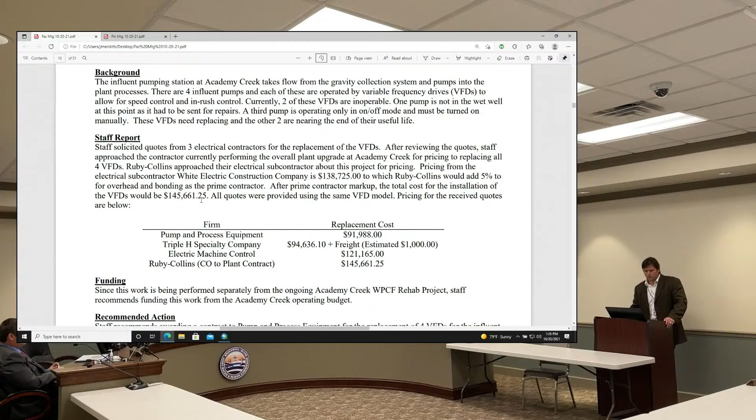$214,000 for 5,000 feet of water line replacement. But I guess it's a lot. There's a lot of permitting that's going to be involved with this one. A lot of permitting, yeah, you said that's right—railroad tracks. That's why I'd like to see where it is.

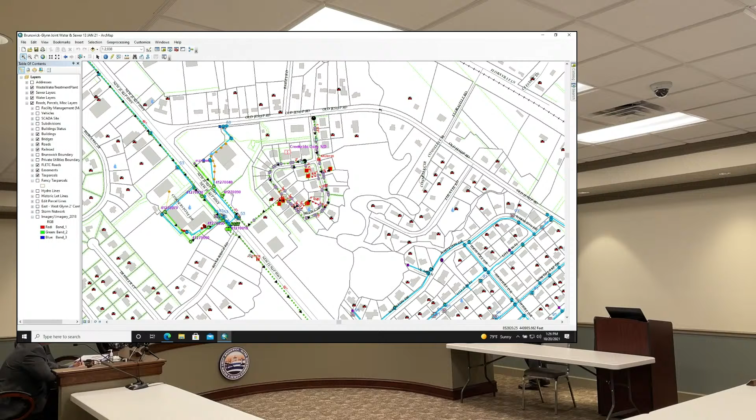Got it, so let's take a look right here. Okay, Tractor Supply, who's familiar with where that is? 341, yep, okay, Tractor Supply's right here. Creekside Oaks is a private water system, or they're on their own water right now, actually. So there's a step out. Yeah, right.

Old Jesup Road comes here, curves around and joins New Jesup Road, T-bones into it. Our water line stops right here. So this is one of the loops that we would connect.

All the way to 341? It would go all the way to New Jessup. Let me pan down just a tad. Not too hard there, is it?

There are some wetland areas in there. There's a creek right there. That's just straightforward though, isn't it? Right, most other than that it could be open cut.

The creek crossing would have to be replaced, open cut. Other than the creek crossing, you've got open cut, and it will require a DOT permit to come underneath New Jesup.

Yeah, okay, turn the ortho on so we can see. Correct, there's Tyler Creek right here, so that's a little tricky spot. Also Bailey Road.

We would also be dropping a T up to Bailey to Perry Lane as well. Now, when they tie in over at 341 and back at the other place, we're not gonna just let them use a tap and sleeve valve, are we?

Are we gonna require them to put in cutoff valves on the main line too? Because it's real easy for them to just say a tap and sleeve valve, but we sometimes need valves on that existing line also.

We've got a hand line out here that they would just tie into. Sometimes if it's hot and they can't isolate it, they'll do a tap and saddle, but typically we try to cut in.

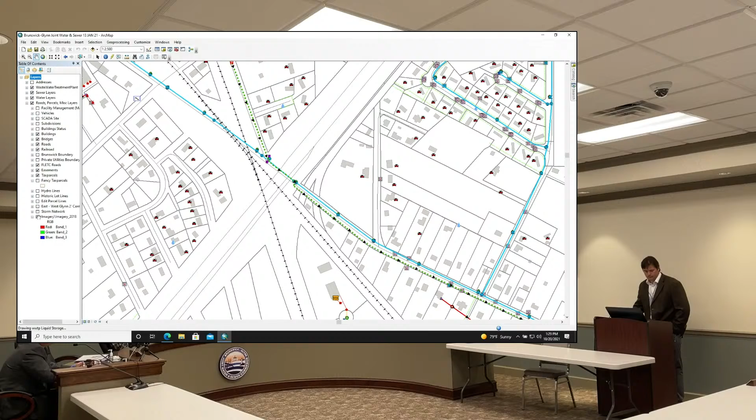Okay, coming to the intersection of Crispin and whatnot, this is the Hatala, the infamous Hatala. I'll turn this back on. That's underneath the interstate there, Old Jessup, come back just a little bit.

Is that where the pressure reducing valve is you wanted to put in, Andrew? Not right here, no sir. Cate Road comes down here, pump station 4105 is just a little ways up here, railroad tracks cross under here.

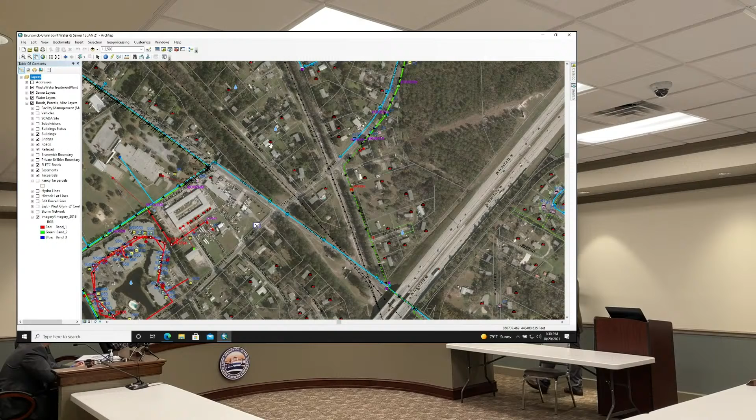And this would directly give redundancy back to exit 36, going to the north, feeds straight back down. Perry Lane, Crispin, whatever that is, right, the Kate Road right there.

Kate Road, you can see how far that is single fed, because that dead ends down there. There's only one line all the way down Kate Road right now. But this is just a straight line?

Did this line have any permitting? There'll be potential railroad permitting on this one. It parallels the railroad, so you may have to get into the railroad right of way to get that done.

I'm not real sure what I did here. They're not gonna let you put a parallel line in the right of way. We've got to figure all that out.

Well, it canceled it. Hit the restart at the bottom left, the circle, refresh. There you go, yeah, I was trying to not click too much. GIS gets mad when you click around. It does get angry, it gets angry.

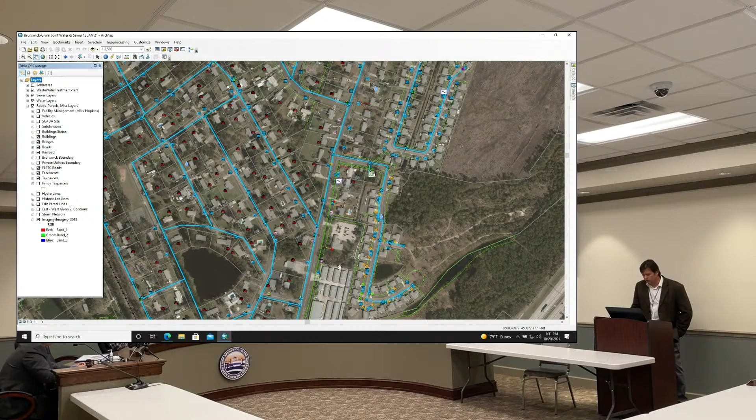So going back up, you'll see the school up here in a second. Back up Kate Road, so all those neighborhoods off of Kate Road are single fed right now off of Perry Lane Road.

So if any break happens down there, you have to shut off that entire main, and you're shutting off multiple neighborhoods. And then the last one you can see there would just be going under the spur.

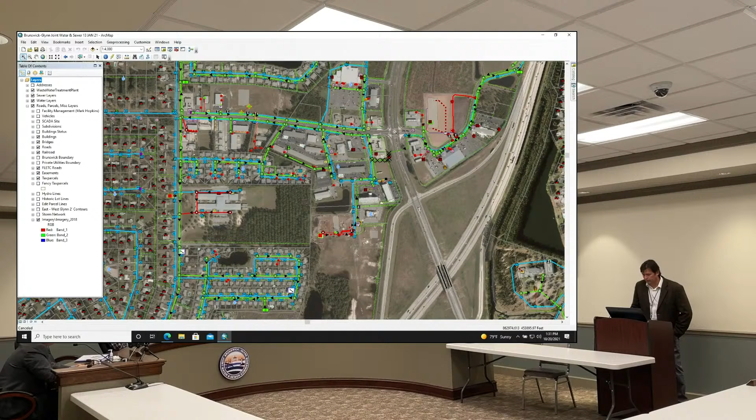Correct, right here in this vicinity, there's an intersection with a gap in the eastern system coming off of Harry Driggers, underneath I-95, and it stubs out here, dead ends. Then this all goes back, like Mr. Burrow was saying, towards Old Jessup Road. So we connect those two there.

Completing these 3 loops. When you're putting in water lines, how often do you have the ability to shut off the flow of water, a certain amount? Every 1,000 feet we try to put an inline valve, or at every intersection at least 2 valves, since there's a T feed in at least 2 directions, so you'd have multiple valves.

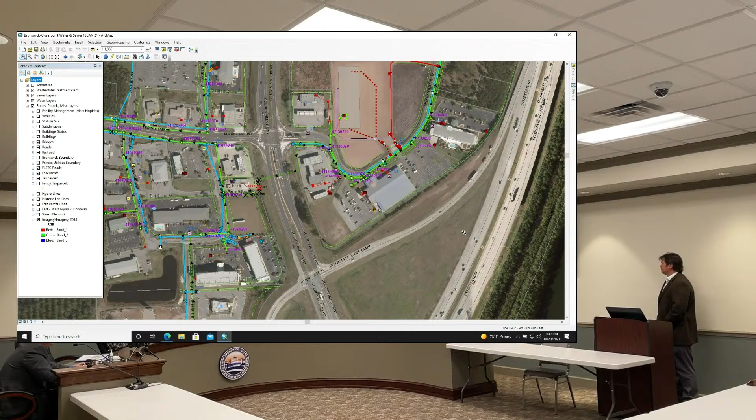Now, the water distribution guys want them about every 300 feet. They want 4 valves at every intersection. I can understand that. That's why when we tie in, the easiest thing is to put a tap and sleeve valve, but then you only get one valve at that intersection sometimes. Yeah, that makes sense.

Now, another question I have: is that all tied on those 3 lines? Yes, sir. Good. What's the scope of services that the engineer is providing for this? We don't understand what that is, it's not listed in here. So far as construction, inspection, design, that.

Permitting, bidding, construction management, reviewing pay requests, any change order requests, anything like that, plus 16 hours a week of construction inspection services. So they're basically our owner's engineer. Pretty much, yes sir. We will also have our inspectors out there periodically, but they will have their own inspector out there at least 16 hours a week.

This is the same firm doing the North Mainland, right? They were a subcontractor to the engineer on the North Mainland. But are they the ones providing the inspection on the North Mainland force main right now? Yes, sir. And is that 16 hours a week on that too, or what is it? 16 to 20 hours a week, yes sir.

So is it their inspector? Yes sir, Mr. Klink I think his name is, doing the inspection on that. And we're satisfied with that? Yes sir. That project took a while to get started, but I think when Mr. Klein goes through the project report, we've got good news to report on that progress thus far.

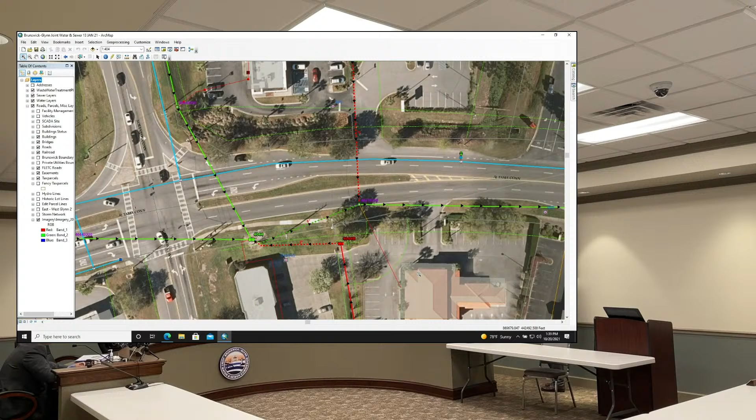And what's the reason for moving the whole thing over? The station here has a control panel and whatnot, so it's above ground and visible. The commercial entity here has requested numerous times, can we move it? It's difficult to move a pump station, but what this will become is the underground structure will stay there, and it'll essentially become a manhole, just a large manhole.

Okay, and then it'll be rerouted to a fenced in area. Correct me if I'm wrong, we don't actually own that parcel, we're there by easement, correct? It's actually an easement, correct. We have a dedicated water and sewer easement that this green line indicates right here.

It is an eyesore a bit, sitting there in the corner, it's noticeable is what it is. Similar to what you'd find in front of the Sonic, the station we just did in front of Sonic. Being in that easement, we're very restricted in how far we could expand the station and do any work at it. Certainly if we put a fence there, it would block their view, not good for a commercial entity there for sure.

So the new location's going to give us flexibility for the future also, if we need to expand it or increase its pumping capability. One thing to consider here on this pump station, everything from up by Home Depot goes across the spur and drains into the station. So this station doesn't look that impressive when you just drive by it, but a lot of water goes through this station.

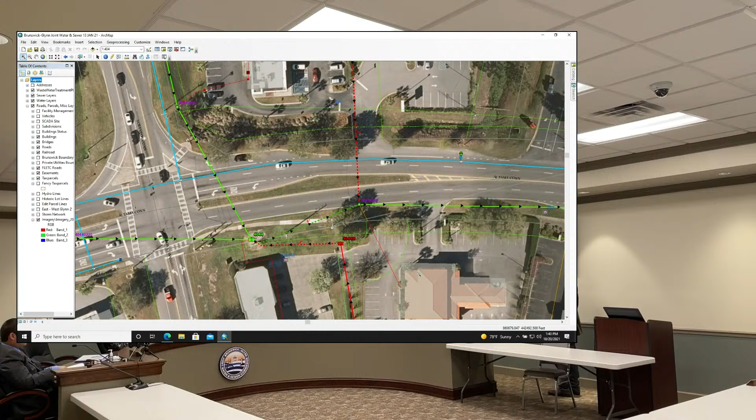What's going to be the capacity of this new station? This station, I want to say it's about 1,000 gallons a minute or so, because it's going right to essentially 4021, which is just downstream from here. Is 4021 the Sonic one? Yes, that's Sonic. I'll tell you something interesting to look at right here.

So here's the proposed site, here's the receiving manhole. It's just a very short distance of true lift pumping, a jumper station, so we get it to gravity right here. It's a shallow gravity manhole. Unfortunately, it's not deep enough to do away with the pump station. We sure would love to do that.

So it's just a jumper pump station? It is, that's all it is, a short little run, 50 feet or so. Could almost put a screw lift pump station in there for aesthetics. Screw lift pumps, okay. Old Archimedes. That would be the first one of those we had in the system.

I'd like to see that, that'd be pretty neat. And from an aesthetic point, is it going to look better than the one that's there now?

It'll be a little further off the road, and we will have a fence around it. For our fencing example, please drive by the K Street pump station we just finished, 4003. We started using this black coated vinyl fencing and it'll look a lot nicer out there. We have some pictures in the report we could show you. That may be our new standard for where we put fences, because that looks really nice out there.

So there's not a whole lot of inspection on this then? No, sir. No, sir.

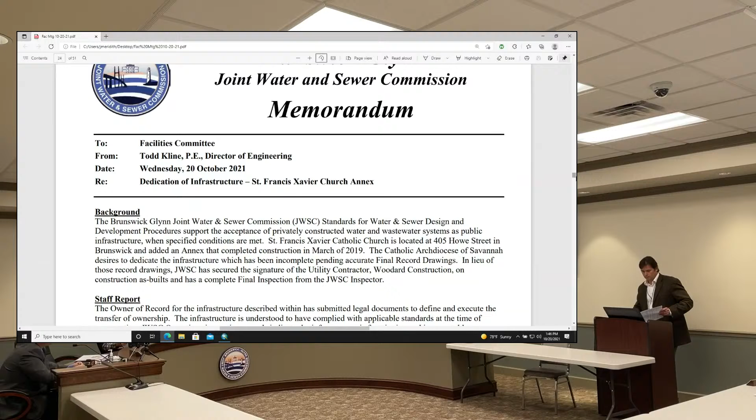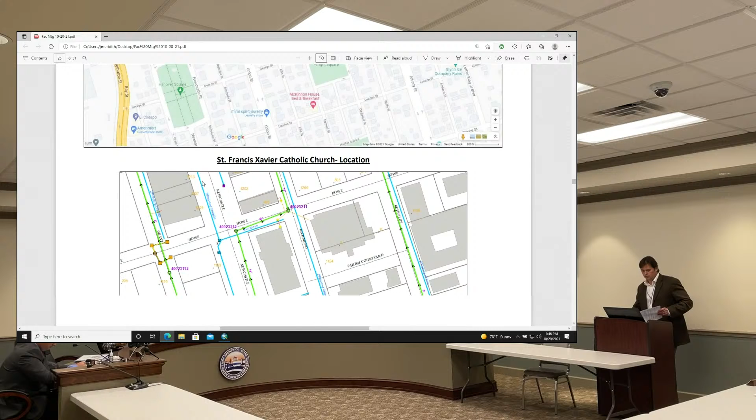I'm going to skip down through here so I can get to our... let's see. Okay, if everybody knows where St. Francis Xavier Catholic School and church is, it's right next to Hanover Square, just north of it. So what they did is they joined... and the GIS doesn't show how it formerly was. I can turn on the abandoned layer possibly.

They joined the two buildings here with another structure, and a water line was in between, and the sewer also went through here. So the structure couldn't be on top of these assets, so they chose to reroute the assets, and that's what they did. The sewer was rerouted, and the water was redone as well. GIS still needs a little updating once this gets worked through; it's been in a holding pattern. Part of our process is in dedications and new infrastructure, once it's dedicated and the board accepts it, then it moves forward with changing our mapping and all that.

So this one's been in a holding pattern, and it's kind of a good example to share. If you read the staff report, it talks about obtaining the record drawings. The end of every project is the closing documentation, which includes record drawings - that's the formal as-built, where everybody signs on it, contractor, surveyor, engineer, all that.

I think everybody here can understand the value of having record drawings of what's been put in the ground. It helps for future needs when somebody needs to tie into that or maintain it. Sometimes at the end of projects, the record drawings are looked at as a formality and sometimes brushed off, and we aren't quite able to close the documentation piece of it. That's why it's been in a holding pattern.

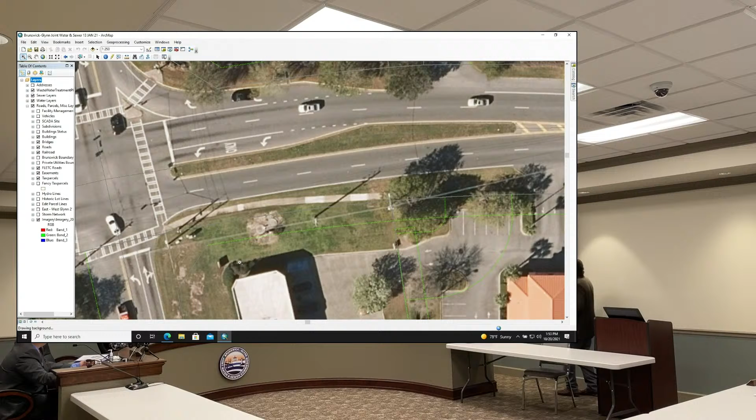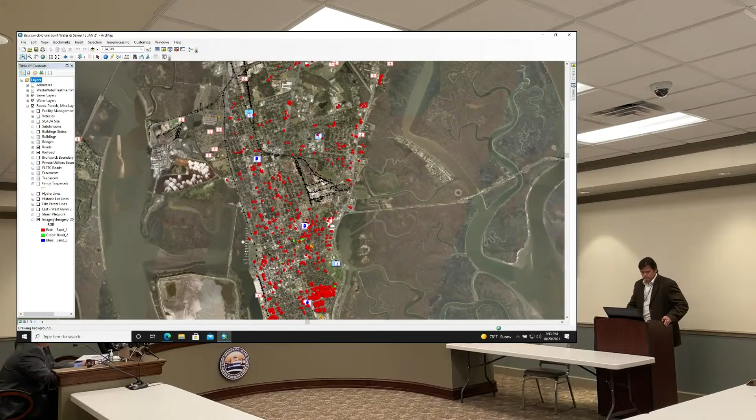Well, I can zoom in. Yeah, it's a good project. Very little benefit to having Richmond Street right there. Right, yeah, it's a good project overall. It helped the school grow and all that. I like that we did that, and I don't have a real issue with the variance.

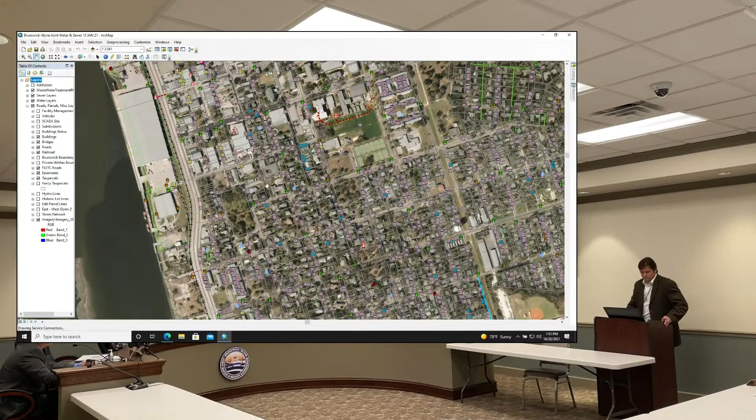It's just, I'd like not to pass the risk on to our customers. The most effective way to get record drawings is to make sure you have them before they occupy the premises.

Now, is the new line an 18-inch sewer line, right? That sounds plausible in that area, yes, sir, but let's double check it. Do we know what grade it's on? I would assume minimum. It is 18-inch, and amazingly, they were able to meet minimum grades. They actually were, I was really surprised. They lucked out in this case.

But 18-inch, new PVC, they didn't upsize it to meet them, did they? No, sir, they didn't do an upsize. They did a little cheap technique, no, sir. But they're not showing it here because the ortho is not updated, but they actually bridged right here with the building, from here to here. So this is all rooftop now.

So they closed that section of Richmond Street, yes. So there's a water line and a sewer line, is that right?

That's correct, that's correct. And we're going to clean our GIS maps up once that moves through the process. It'll go to GIS for closing, and they'll get the maps corrected and accurized.

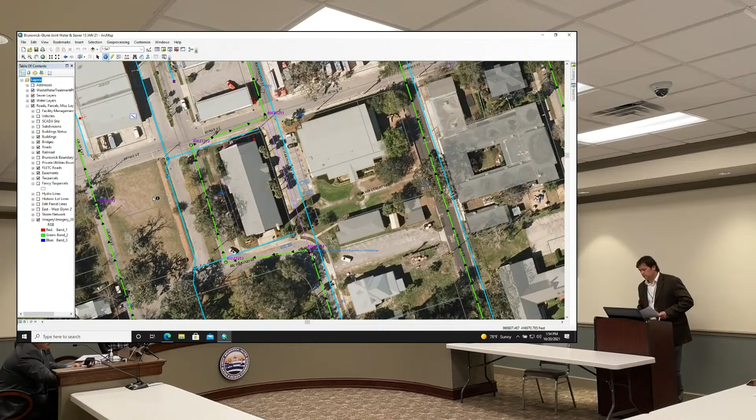Any other questions? All in favor? Motion carries 3-0.

Thank you, moving to the discussion section, Water Pollution Control Facility Plant Flows Report. Yes, sir. At Academy Creek, you'll notice the numbers from this month are remarkably similar to the numbers from last month, very consistent flow. We had similar type rain for the month, but at 7.8 million gallons a day, leaving the facility there about 58% capacity.

Everything in compliance on the way out of the facility there, with 96% removal on BOD, 96.5 on TSS. One thing I will note, at the end you'll see 113, 114 tons of sludge to the landfill.

Had a problem with the dryer where we were needing a thermal fluid pump that had a bit of a lag on it. That was installed end of last week, and those of you that don't know, we call the dryer Sarah. Sarah has been back up and running for a week, so we're back to drying sludge down there. How does the cost of that additional weight compare?

Well, $35 a ton is what we pay to dispose at the landfill, and we go from about 15% solids to 98% solids, so there's an awful lot of water that comes out of that. So basically there's about 60 tons in there, too. Yes.

Yes, sir. So now we have 2 pumps, because we ordered 2 to make sure that didn't happen again—about $1,800 in additional sludge hauling cost. Should we start looking at a backup dryer too?

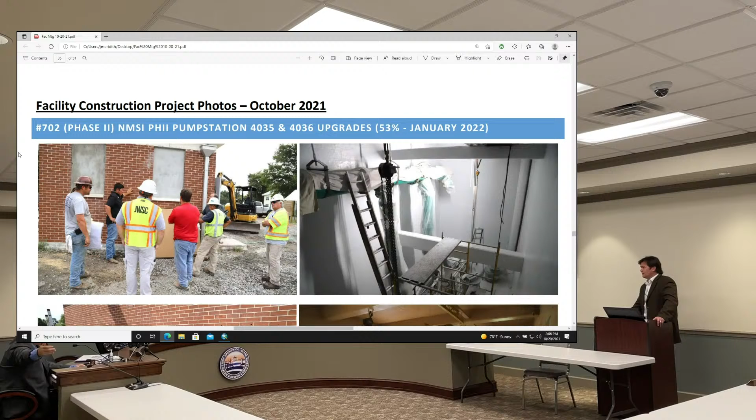This one's pretty visible, well, this side is. Yeah, heading down 341, right there in Arco. It's on the edge, and now we're going to have a black fence all the way around this one too. Fencing replacement's not included in this one, is it? That's a great question, I got to go back and check. We took it out when we economized it, and it came back higher than expected. We reduced the scope, I think we took fencing out of this contract. Yeah, because 36, I think it's the same way.

The fencing would block that. It's not from sticking up above the roadway, either fencing.

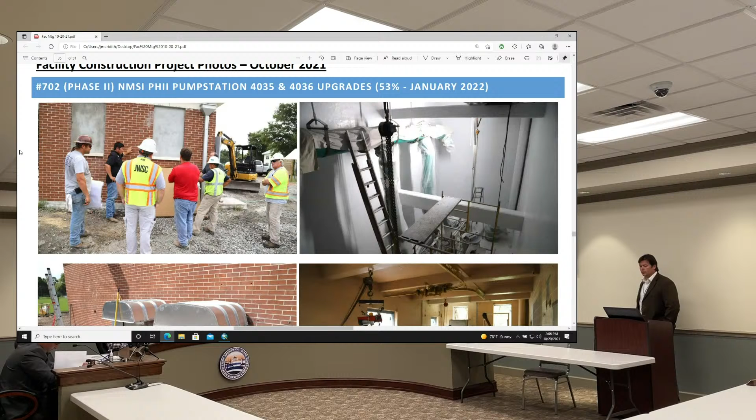Those are fairly decent looking pump stations, but if we got two big concrete blocks right in the center of it, I think that's not very pretty. They'll be painted to match the soffit and whatnot, but it'll look nicer than that. Certainly, if there's more desires, that's easy stuff to do there. But inside the stations, they're looking good, getting cleaned up, new ventilation on top of the wet well structure.

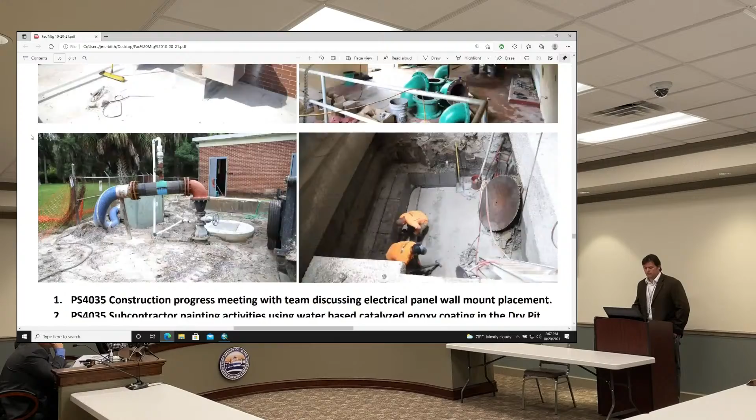Okay, and an associated project with this one is 702, force main reroute up off of Harry Driggers Boulevard. That's where all activities happen now. It's going very well. Pipe installation, all the 18-inch is essentially in the ground, open cut. And boring contractor should be here very soon. Water on canal will be moving forward as well.

According to the last message I got on an update Monday, they got to station 112 and they're testing up to station 112 now. Pump station 112? No, survey station.

Where's that? Beyond Southern Landing, back to the south where it curves around through there. There's still some stretches that need to go under some wetlands areas, so it's not all connected all the way down. We've got probably 9,000 feet of pipe in the ground, something like that.

And how much have they tested? Have they tested some of it? As they go along, they test, yes, sir. So, as Mr. Burris said, this last segment will be tested. He sent a message while we were in the meeting. They pigged it, they're fixing to go through, clean it and test it.

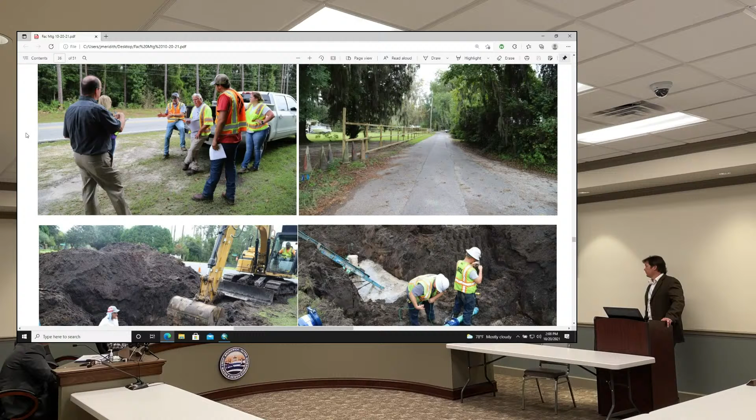How deep's that line? 4 feet, 5 feet. The open cut section, correct, yes, sir. You can see in this bottom picture, or the middle pictures, it gives you an idea. It's about shoulder height to these gentlemen here.

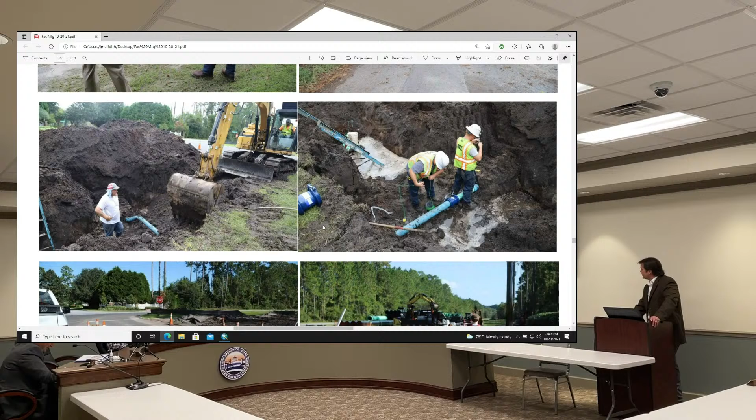See that down there too. That's where they got into an unmarked 4-inch water line. Who knows what that was, but it was in the ground and we didn't have any record of it. Maybe it was an illicit tap. Yeah, it could have been, or an old piece of PVC, who knows. But it wasn't sewer, thank goodness, because it's blue pipe.

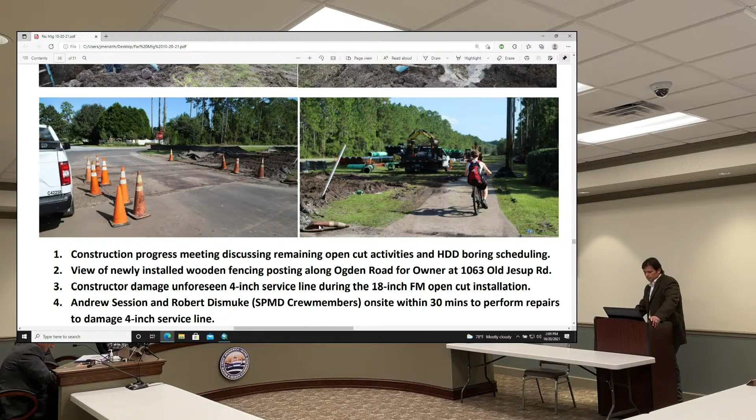I believe that is Southern Landing. I was thinking Southern Wind. Yeah, right there. It gives you an idea, they're keeping it groomed and in good shape, and our inspectors are on top of them. The contractor's doing a good job.

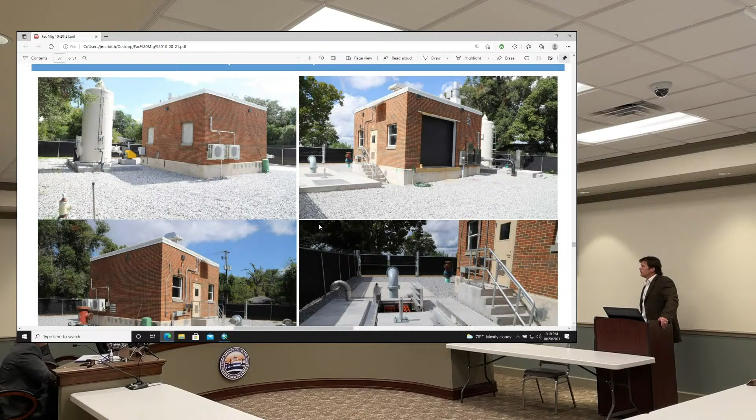Pump Station 4003, Project 703, is substantially complete. We're working through punch list items on this one, most notably some VFD issues. One of the VFDs is getting tweaked and adjusted. That's a good looking station. I really encourage you to drive by.

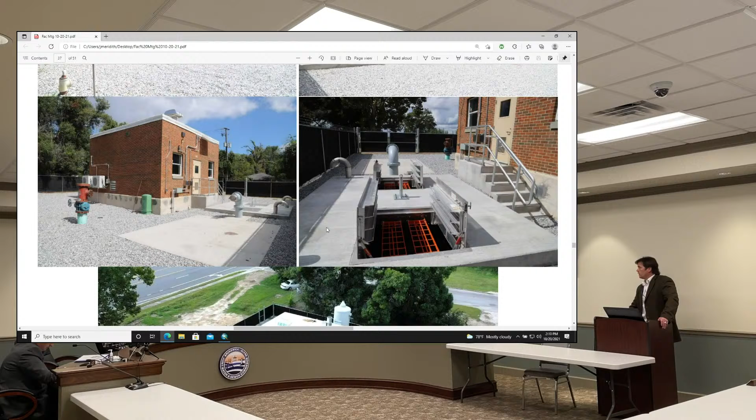The alleyway is reopened again, so the residents have access back through there. The fence is up, so we're not occupying any of the adjacent property anymore. We're all within our fenced-in parcel now. There's a pretty good overview shot of it from above. Looks really, really nice out there. Odor control tower to the north.

Two questions on this. Are they furnishing a bypass pump? No, sir, it's just a pad for our bypass pump. It's a pad for us to pull a bypass pump there. So we're going to put one there? Not permanently.

And all of this area around the site outside the fence, that's from their construction, correct? Yes, correct, they put seed down. This can be revegetated. Our site is the fenced-in area.

I think the city still owns it. They own all the way to the roadway. Are they down where your hand is now, back this way too? Well, this land here is owned by the tourist group. My understanding is they own this, and they actually allowed us to occupy it during construction. They gave us a construction easement. So now we've exited from that property, returning it back to them. So the city only owns out to the right of way. Correct, from our fence out this direction. And this is actually alleyway as well from here out this way. So this is back opened up again, so you can drive back and forth.

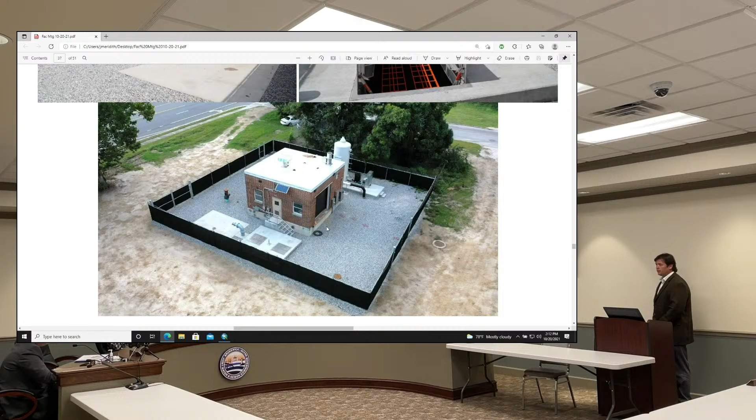So of course we had some challenges we talked about along the way, but I'll tell you what, the contractor really brought it to a good close here at the end. They've done quality work, and we hope to have these last couple items on the punch list addressed here in the next couple of weeks, and then the project closed out.

Okay, Canal Road to Glynco, project 704, this 12-inch water main has been on hold due to the wet conditions out there. That's an in-house project, and our pipe just arrived today for the directional pulls underneath the two FLETC entrances.

Well, that project actually has three parts. The open cut section we're gonna do along Glynco Parkway, we have a contractor come in and do the gates of FLETC, and then this project also is bringing a water line down Canal Road, down by Canal Crossing. Another one of those loops that will take it by the airport and everything and give it multi-directional feed.

Yes, tied in with this, this is going to give redundancy to the airport, industrial park, all that, because right now it's a single feed through FLETC's campus on Memorial Drive, a single 10-inch cast iron that feeds that whole area. So this is going to create redundancy here. It's been needed for a long, long time, and the Airport Authority is very excited about having this in.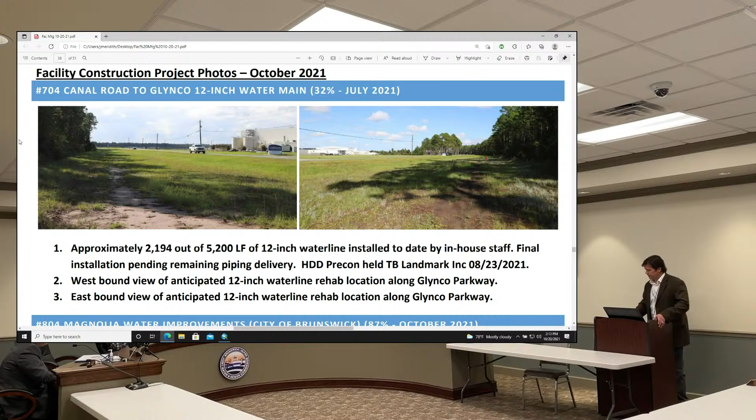Magnolia water improvements, all of our work, joint water and sewer work, is completed there. We are just awaiting eagerly record drawings and a final pay app from the city of Brunswick to close this one out.

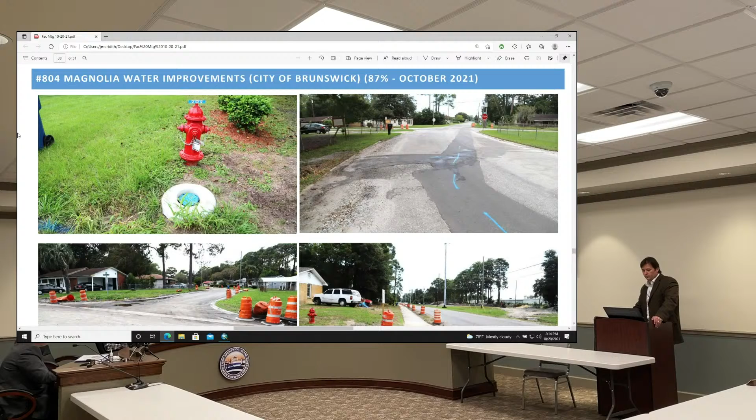So there will still be ongoing storm work and pavement work. There will, the city of Brunswick - our portion of the project is complete. City of Brunswick is continuing with their roadway and drainage improvements throughout Magnolia Park. And we're going to get them to straighten up this hydrant right here.

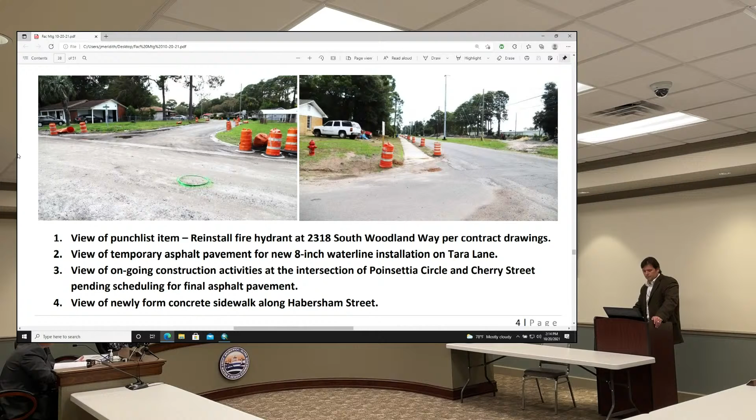Level tells the tale. What did we learn on this? Well, we learned that sometimes you can go on the shoulder of the road in established neighborhoods. It can be done. I was doubtful to begin with, but what we learned is Todd and I can be wrong, despite how much we don't want it.

Is this being recorded? Yes. Okay, I didn't want to bring that up, but...

What else did we learn, with the city and on projects like this? We probably learned something else too. Always something to learn. There's the combination of effort between us and the city - it's a good thing because you get in there and disturb the neighborhood one time to improve utilities and improve the roadways. That's a good thing.

Obviously there's the contractual side of things. We're working through the city's contract with the contractor, so we don't have contractual control over the contractor, so that's a little bit of a challenge sometimes. The city honors all of our, we have to review and approve everything, pay apps - we still control the money, but officially we don't have a contract with the people doing the work. That's one challenge that can come with cooperative projects like this.

But I think you get in there and get it done, you work together when you can. At least we're not, you know, streets being paved and then we're going in and tearing them up putting in water lines. It's painful for a bit and then it's done for the residents.

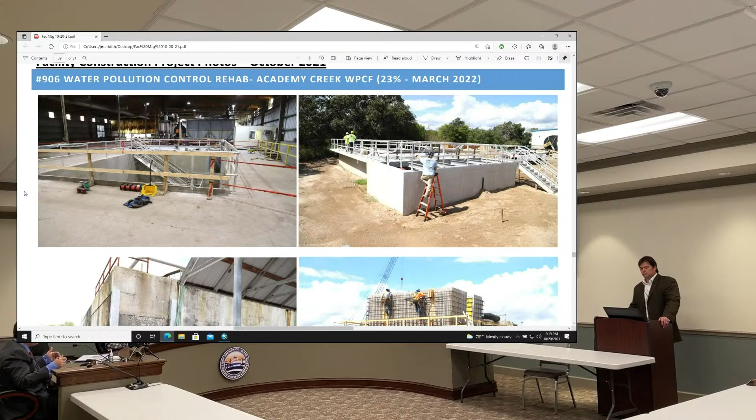That was in the contract? That was in the contract. I was up there the other day, I'm a bit of a belt press nerd, and it looked better coming off the belt press with the new polymer equipment than it had the whole time I've been here. So that's a win all day.

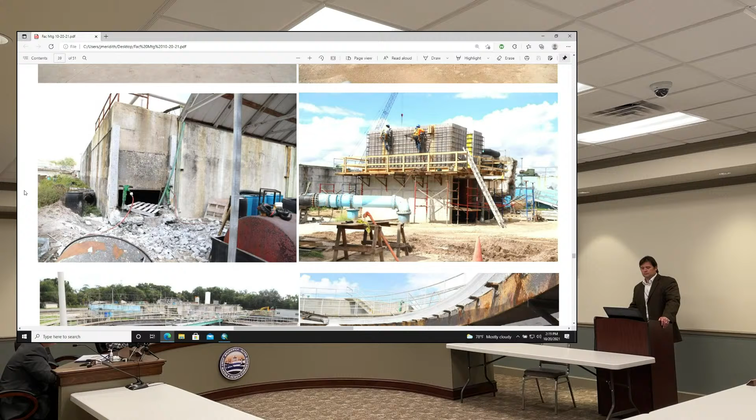Installation of handrails and grading is going on at the filter equipment. Go back up, on the right there. That picture shows the dryer at the very top. So you could explain to Commissioner Cook where the new dryer would go. It would go immediately to the left of that. What you're pointing at there is a boiler, so there'd be another boiler to the left.

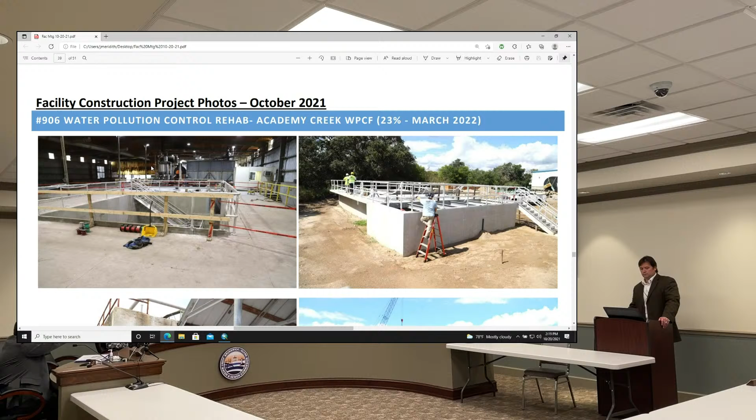And then the dryer, zoom in, let's see if we can do this. To the left of the pit in the foreground, the dryer is that round area. So it would be immediately to the left of that, the belt presses are to the right. So then that open area between the boiler and the dryer behind it, there would be a secondary boiler and dryer. Oh, okay, gotcha, okay, you can zoom back out.

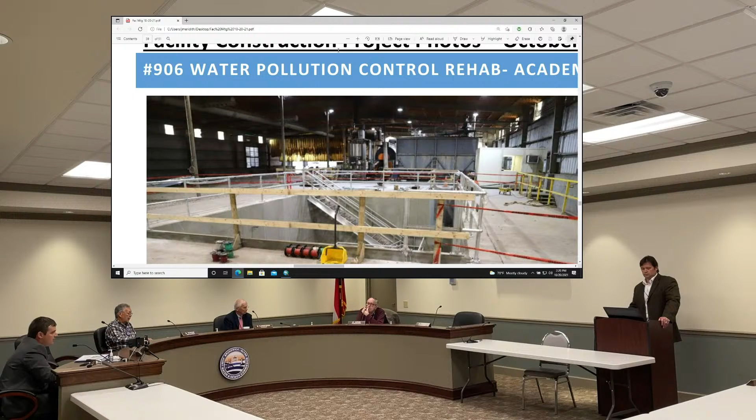So the filters are ongoing, they've got grading installed, and now they've got electrical panels installed up there. The wires aren't landed yet, but the panels are in place. And you now don't have to climb a ladder to get up there, they've got the stairwells in place, which is much easier for getting in and out.

Good. We go down, that is aeration basin number 1, that is where the RAS does not go in right there, but there'll be a new concrete structure adjacent to that that allows the RAS to go in. The existing one, when we got over there, we figured out there was about 6 inches of daylight between the bottom of the concrete structure and the ground. And we did not want to start dumping new amounts of flow into a structure that was floating. So we tore that out. Small change order on this, inside the allowable amount we had in the contract.

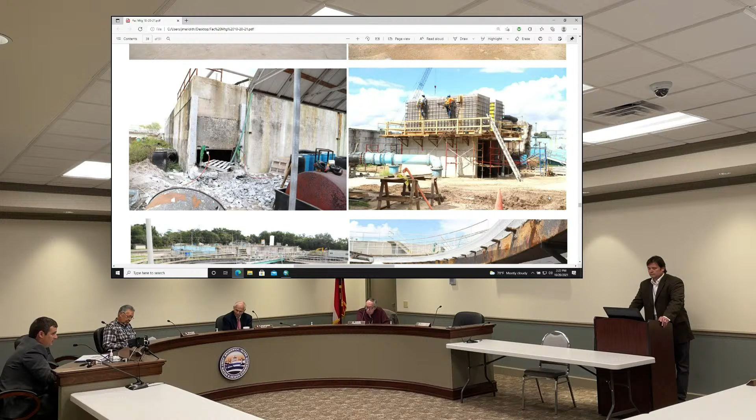And then we've been working on the clarifiers, shown in these bottom 2 pictures. The picture on the right kind of shows it more. You can kind of see those slanted fiberglass installations there. That is a density baffle that prevents sludge from short-circuiting and coming out. So as the velocities increase coming out of the basin, sometimes the sludge will go up the walls and go out. Those keep it from coming out. So that doesn't look like an awful lot of help, but that will actually prevent any sort of solids wash out in the event of high flows.

And we're doing some center feed well improvements. The flow comes up in the center of the clarifier and then disperses. The existing ones are circular, so technically a circle doesn't have a side, but there's 4 sides where it comes out. The new ones have 6 sides, so it helps disperse everything more evenly throughout the basin.

The weir troughs there, are we cleaning those up and repainting those? We're going to clean them up and get pricing on repainting. We got pricing on repainting all the weir troughs and the skimmer arms and everything, and that was a bit outside of what we were wanting to do there because we have 6 clarifiers, so it gets multiplied rapidly. But we're getting pricing on some touch-up areas.

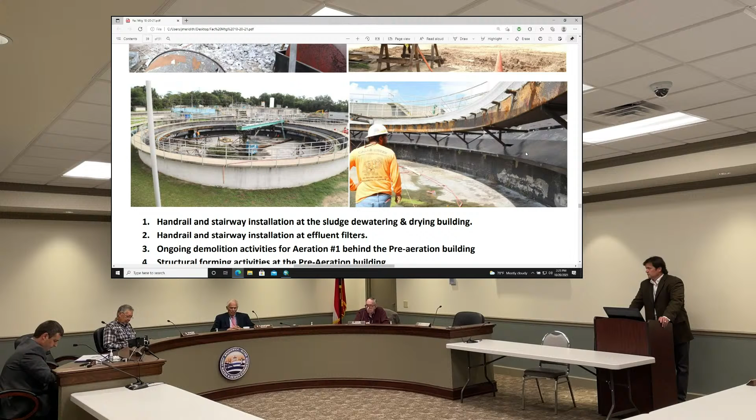And we've separated the sludge lines from clarifiers 1 and 2. I think that's all that we've got going on right now.

And when's the completion date supposed to be? First week of May is what is currently scheduled as their completion date. Contract date is March. But the bar screen has been delayed to the end of January.

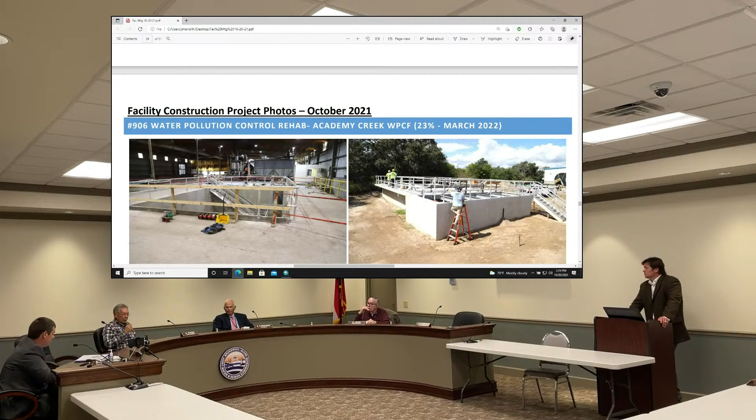Apparently there's a steel shortage, but the scrap prices haven't gone up yet, so that doesn't make any sense to me. Seems like if they needed steel, the scrap price would be increasing. It's all stuck offshore.

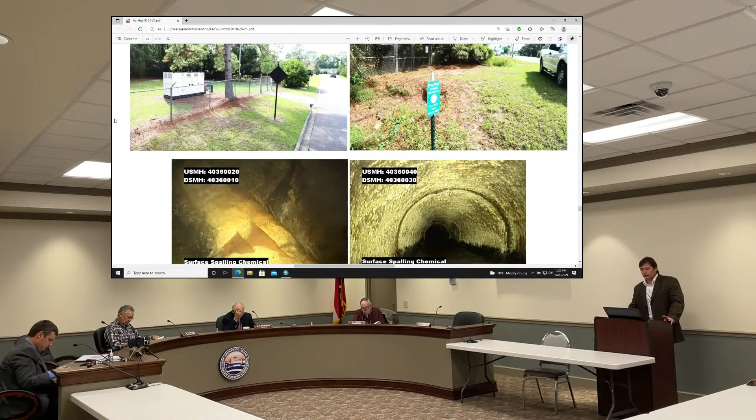All right, good deal. Moving along to basin 4105, 107, and 4036 CIPP rehab. So 105, 107, we're essentially 99% bid ready. We're going to make a determination on what we do for the upgrade of those two stations, and as part of that project is the 36 basin lining work. Just a couple good pictures of typical aged infrastructure, a couple defects and whatnot from some of the CCTV video.

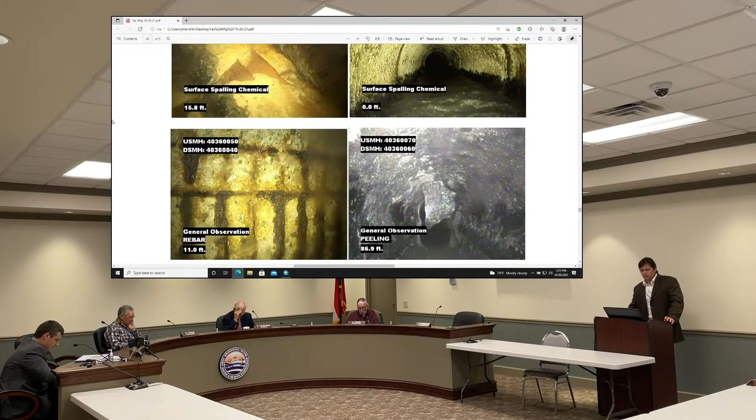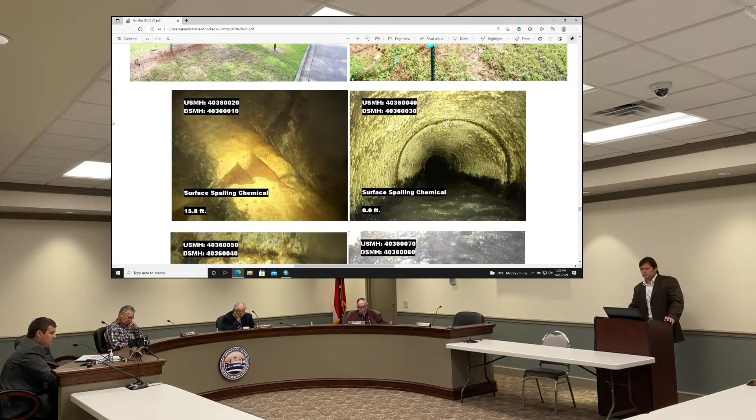That our contractor did. Where are these lines, Todd? A few of them are around exit 36. Okay, 36, that's the section from 36 directly upstream by the railroad tracks. Yeah, so that's behind Rich CPAC, off of Glendale. Is this a concrete pipe? Yes, sir, it's RCP.

Although there doesn't appear to be a great deal of reinforcement remaining. There's the whale bones, rib cage. Will we be able to slip line this, or will we have to replace it? They can line that. That looks very similar to what we just lined on Whitlock. It is, yeah. So this will be lined.

The company's back in town. They're looking at bypassing over the creek there behind 36 to do some of these pictures you see, that segment behind Rich CPAC running parallel to the railroad right now. So they're working with the county to trim a few shrubs around the historic Altamaha Canal and make that bypass across the creek. That contract's not for relining too, though, is it?

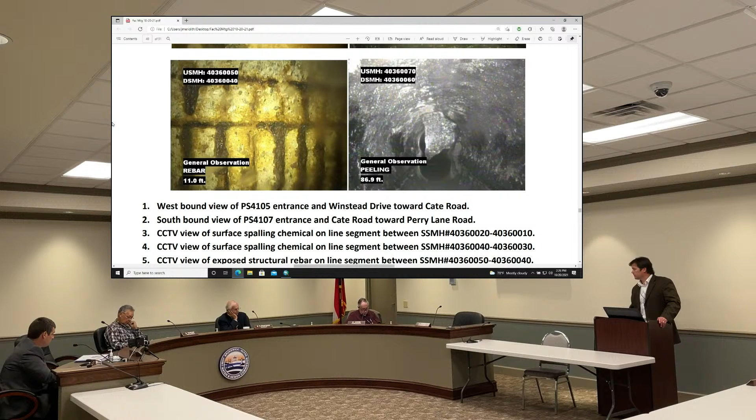Yes, sir. And this is all part of, it needs to be done anyway, but it's part of the reroute, the ultimate reroute whenever that happens. So this gravity line is in good shape to take that flow from 4105. Okay.

Okay, Bergen Woods, good news on Bergen Woods. So we expect by the end of next week to have all the pipe in the ground for the force main. That's the force main that serves the safety complex pump station 4116. We're really excited that the force main is in the ground. Looks like we're not excited that 4116 isn't done, but we're glad the force main looks like it's going to be done before the pump station.

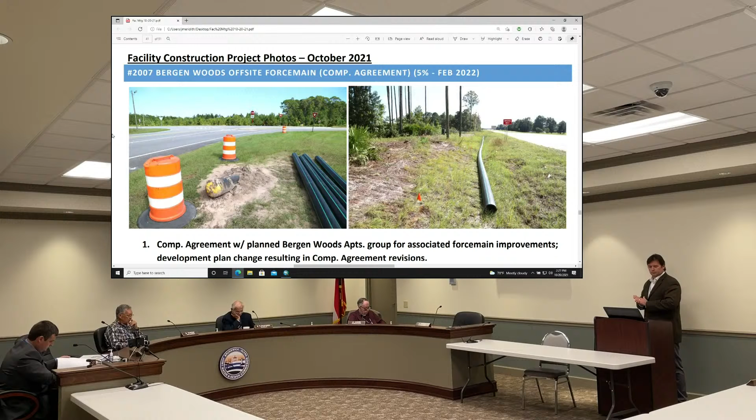Still waiting for a couple electrical items at the pump station to be installed. We'll be testing that. I think they're going to test it this week and make final connections and whatnot by the end of next week. So we're looking in good shape with that one. And this is a comprehensive project with Bergen Woods.

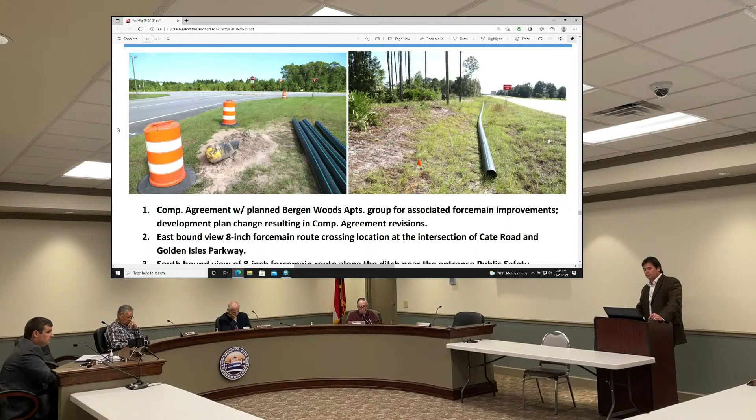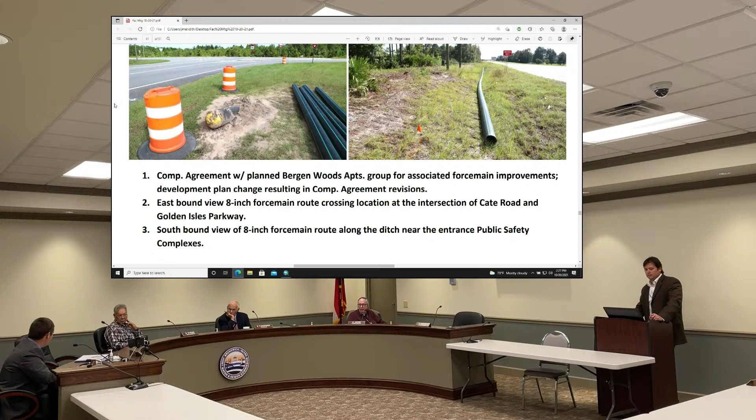An 8-inch force main, which opens up potential opportunities for extending further up the spur to neighborhoods. There's a couple neighborhoods up towards 99 that we've actually gotten some inquiries from. Additional capacity for a large tract of land right there in between. That's correct, 99 and the interstate and the spur. Right. So we'll see what the future holds with that one.

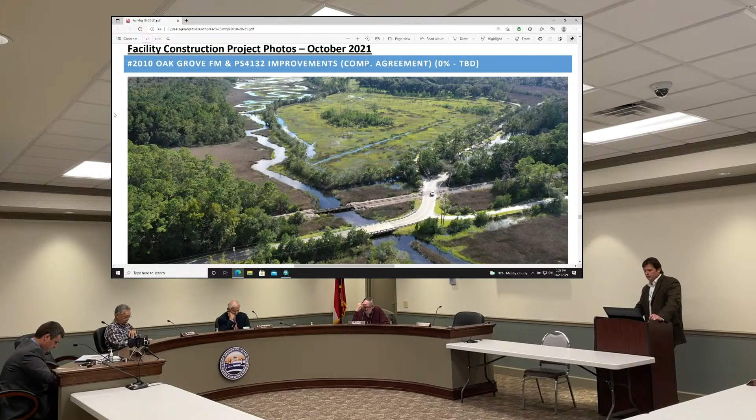Okay, Oak Grove Force Main and possibly alternate pump station 4132 improvements. Comprehensive agreement with a group that's doing a residential development on Oak Grove Island. That was bid out, bids are received, and they're under review by the applicant and the engineer of record to determine how they wish to move forward.

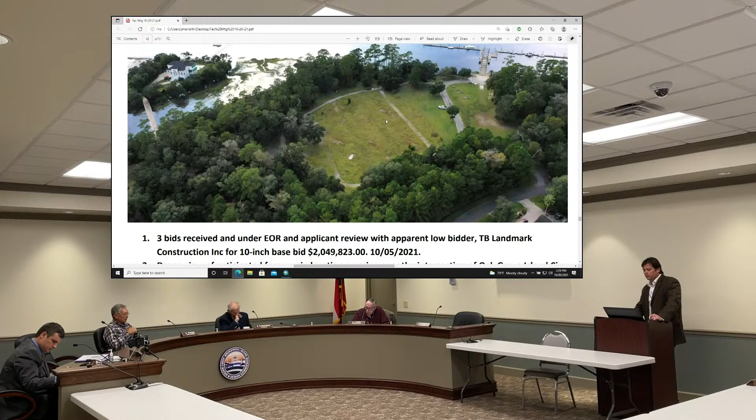That's the site of the residential area that's proposed on Oak Grove Island. These drone pictures are really good. They help give a good view, don't they? Yep, a lot of clarity too. Amazing, right.

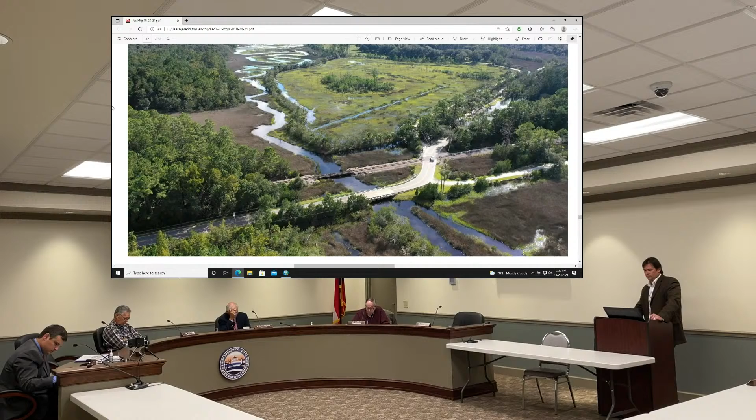Yeah, we have a good drone force of at least 2 or 3 certified drone pilots on staff. So, all right.

2002 force main replacement. Mr. Burrows, I'll let you take it. Yes, sir. This cover project is out for bid right now. We held a pre-bid, had 3 bidders attend the pre-bid. We are accepting bids November the 2nd for this.

We are buying material outside of the bid process. The bid process would be for the labor. We are getting quotes for materials so that we can get this work started and completed prior to spring break in March. Likely during this project, we're working with Glynn County.

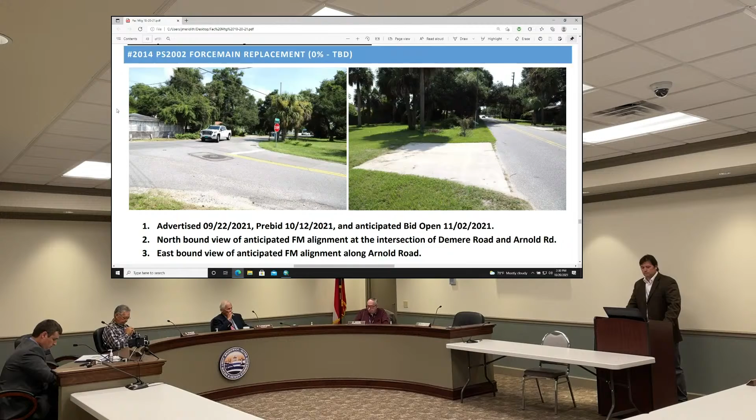We'll need to at least shut down one lane of Arnold Road during construction. It's only 1,300 feet of installation, which doesn't sound like a lot, but it is a crowded right-of-way right there. So it's going to be a slow dig along Arnold, and then we will be boring a section down Demere Road to tie into the existing PVC force main at Demere and Mallory. A lot of coordination - if you've been around very long, you've remembered multiple times we've had to shut down Arnold Road because the existing force main had failed. So this will be a new force main to get off that older cast iron force main.

Okay, Arco area water and sewer extensions. Pre-bid is 10/14 and bid opening is 10/28. Something for you to consider at the next meeting.

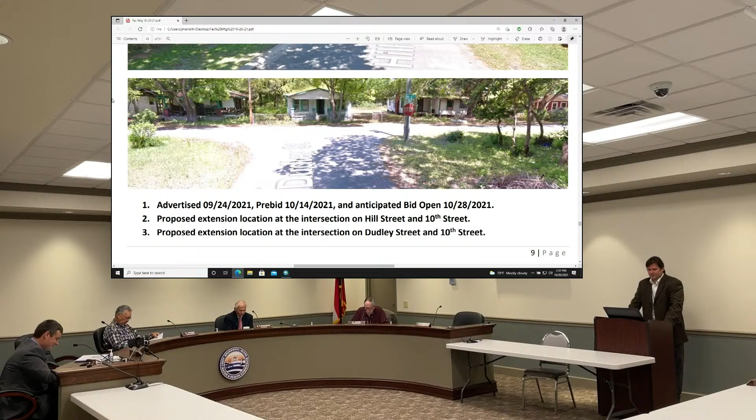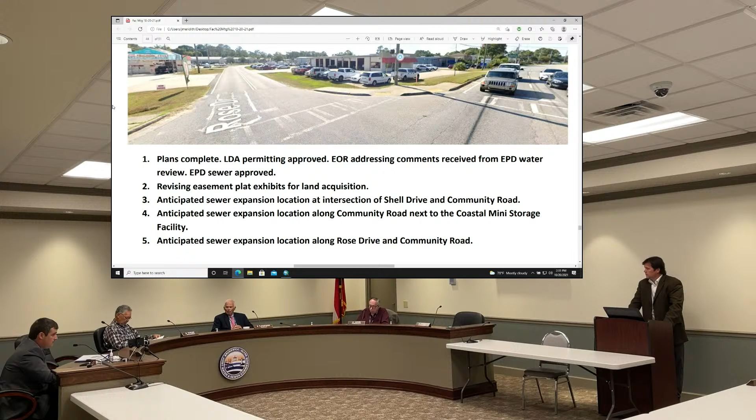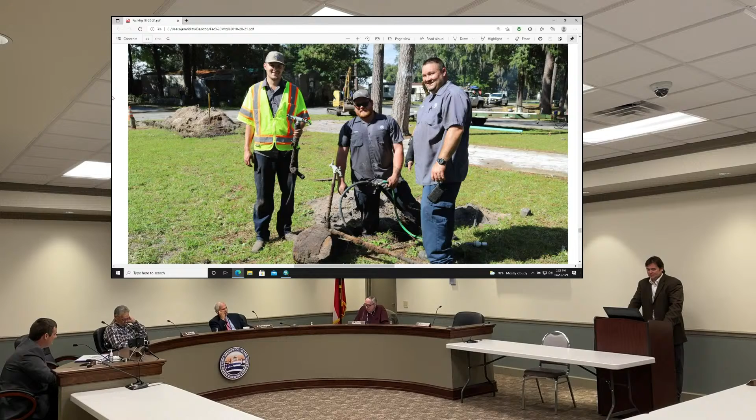Is that illegal connection on the existing galvanized service line that somebody tied into? Yes, sir. So it had been a long time ago - it's been there for a while. They hadn't paid a water bill in several years. Is that a service line we're replacing, or is this a galvanized water line? It's a 2-inch main. And they tied into it? Yes, sir, they tied into that.

It's going to reduce our unaccounted for water. Should it reduce the unaccounted for? Yes, sir. Right, so there's also some meters installed now.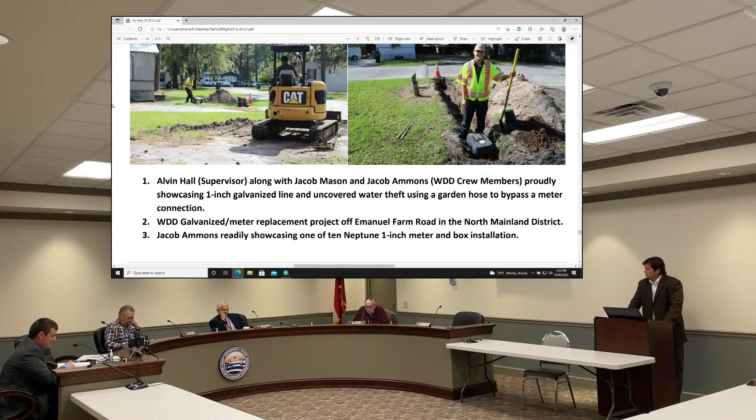I believe this is in - which mobile home park is this? I'm trying to remember, this is the one that's taken some of the trailers from New Hope. What is the name of the one over there? Emanuel Farm Church? Oh golly, I can't keep it - name's escaping me of the mobile home park, but anyway, they reached out to us for some assistance out there with some leaks that they had from the service lines, and the distribution team took the opportunity to install some new meters out there at the same time.

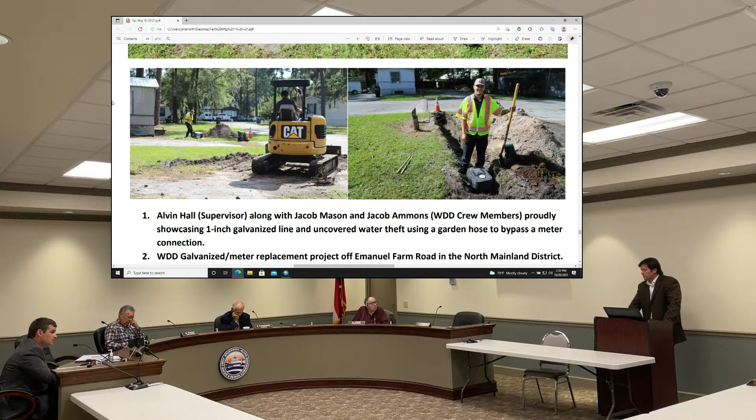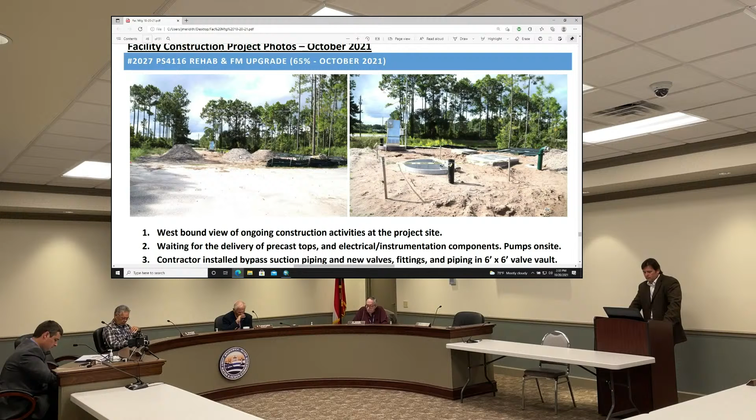All right, 4116 - mentioned this one briefly before. It actually looks a little bit better than this now. All the structures are essentially complete. There's a little bit of final site work, pushing the dirt around, getting this final site grade set, and electrical components were the last thing we're waiting on to get out there.

Got the pumps. Meter...

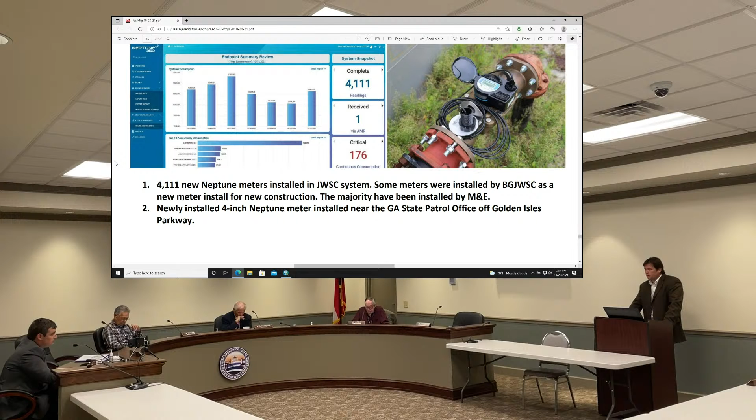Meter replacements, year 1 and 2. We've replaced, as part of the project, a little over 4,100 meters installed. Some of those are new installs, of course, as people get on the system. So we've replaced about 3,900 meters, I believe, so far with the project. Most of those have been 5/8 and 1-inch meters. We do have some of the larger meters replaced. They have been completing an audit of our existing system to determine the amount of new brass that is necessary as part of these installs. Fortunately, we received that audit result back this week to get a better understanding of what the overall cost of the project is as we go forward, because we have to get a second loan to cover the cost of the project. So we'll have the results of that for your consideration at a future meeting.

But they should be back on the heavy push for installs right after the first of the year, about to get kicked back off with all of that. So when they were installing before, they were doing between 60 and 80 meters a day. That gives you an idea - once they get back rolling, and now they know what to expect at every install, we'll be putting meters in the ground very quickly. We have been replacing some of the larger ones too, right? Some of the larger ones have been replaced.

Of course, with everything else right now, the materials, even for some of the larger meters, and the fittings and things, have been a little hard to source.

What's our interest rate on a GEFA loan today? Current GEFA loan is 0.07%. It's like free money. Is that for the whole meter replacement project? That's for $7.5 million of the meter replacement. Based off our estimates from the audit, we were thinking we'd do two $7.5 million loans, but preliminarily it looks like we're gonna need to do that second loan for $10 million instead. Can we apply for some of this SRLF money that every community in Georgia can apply for?

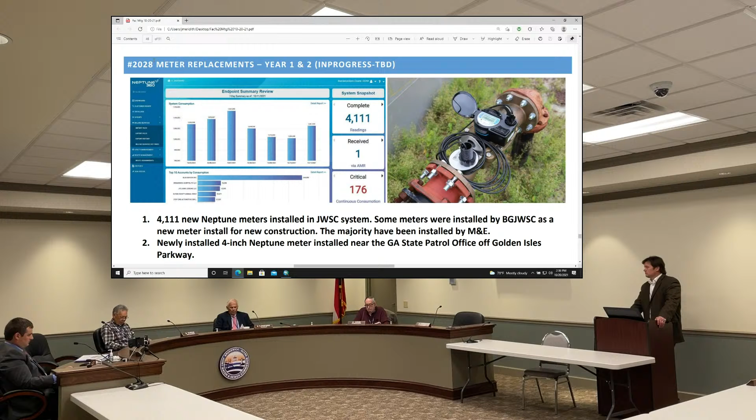Okay, Priority Basin Clean and CCTV, in progress. They're currently, as of this week, doing cleaning and televising in the Glen Haven neighborhood. The scope of this project, if I remember right, is about 71,000 feet of pipe they're cleaning and televising. They'll make recommendations after televising for what can be lined, what needs to be cut open and replaced. We'll review those recommendations, but some lining work will be completed with the bond money.

Is that done with a flail tool or something like that that goes through there? You don't have to cut it away if we're not relining it. If we were to reline the pipe, that section looks pretty good, so we might not have to reline that portion — we'll have to see. I haven't seen the full video on this one. And the same for the roots? You can use the cutter, and you can also do chemical treatment for roots — inject a chemical that causes the roots to dissolve. It's a rotary grinder they can articulate on the end of the robot, same thing they use to cut the service lines. It's basically a Dremel on a robot, a beefed up Dremel tool.

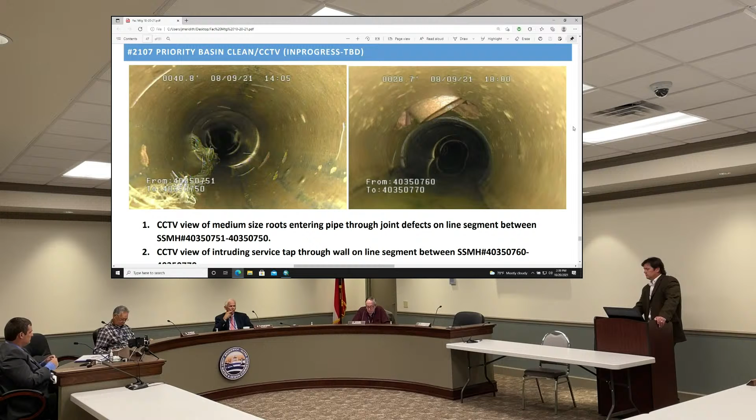We don't have any photos, but one thing I will update on is the SCADA project. We are about 80% through the lift station SCADA installs. We now have all of the panels hung, and I think 93 of them, don't hold me to the exact number, are actually terminated and integrated into the system. We were planning to do a demonstration of the new SCADA software, but we knew today's meeting had quite a lot of agenda items, so we didn't want to push our luck with that. Hopefully next month we'll have a demonstration of the new SCADA capabilities.

And is all the staff up to date, up to speed, trained with the new software? Well, all the staff has experience using it, but as part of the contract they're also going to provide additional training. So all in all, that SCADA project is going very well. They're expected to be back the week after Veterans Day, the third week of November, to hopefully knock out the rest of the installs and integrations prior to Thanksgiving.

Okay, that's in the picture report. And of course, the earned value analysis was on there as well.

Earned value report, you'll notice that our schedule compliance has increased up to 80%. The bulk of that, I will be honest, is the fact that some of our higher dollar projects, particularly the North Mainland Force Main project, is getting back closer to on schedule now that we have pipe going in the ground. So that project has driven a lot of that schedule compliance improvement, but you'll see with some of those large dollar projects, increased compliance with the North Mainland, and the Academy Creek project still remaining close to on schedule, has helped maintain that schedule compliance across the board. We have a couple that are still have some lower compliance numbers, but we're starting to gain traction on those as well. Overall, picture looks good.

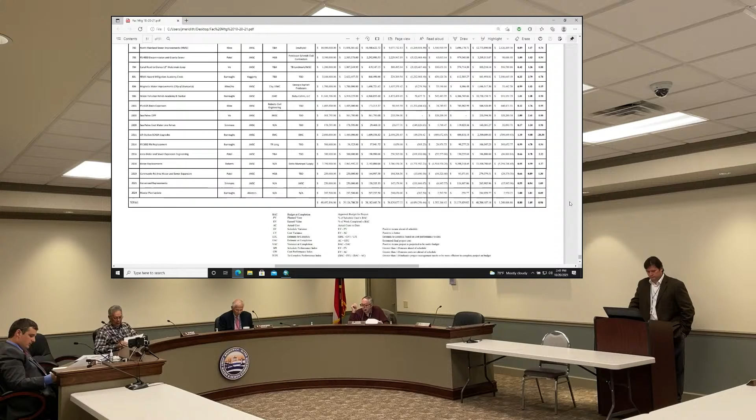Looking very good. I think last year we talked about it at the Finance Committee, we did 16 to 20 million in projects, and we're probably going to be closer to 25 million by the end of this year on projects completed. So 25 completed.

Talk a little bit about the North Mainland elevated tank to us. Yes, sir. As portions of the bond issuance, we are looking at installing a North Mainland exit 42 elevated storage tank. That is an area that is attractive for economic development. There's a large economic development tract at Tradewinds, as well as the Gateway property that is owned by the Economic Development Authority. And one of the things we have been repeatedly told by people interested in that property is, we wish we had an elevated tank in the area. Those industries like having that elevated tank for fire protection purposes. So we are looking to locate an elevated storage tank in that area.

We've got prices, or budgetary estimates, on different size tanks and styles of tank. Mr. Klein's going to pull up some different style tanks here so we can take a look at it. But we'll be looking at the budget for a 500,000 gallon elevated storage tank in that area.

Nice one, there are some nice tanks in there. We lean towards the more, and I think he's put up the legged tank. You see it has the... that's not a pretty legged tank though, that looks pretty old-fashioned. There's that one, prettier elevated tanks than that one. I'm okay with the lattice legs. Yes. That goes. It's all about utilitarian use.

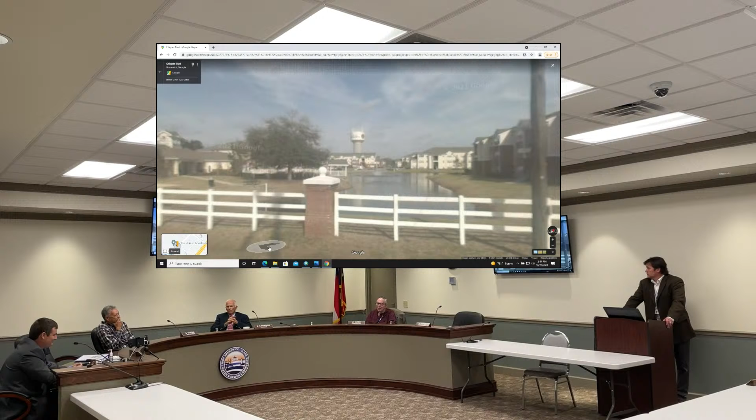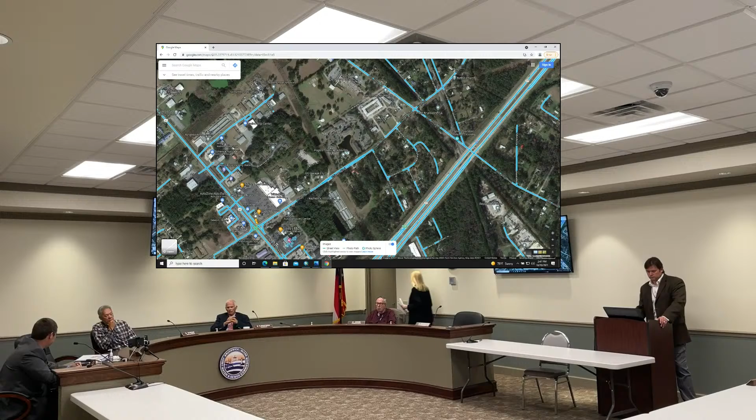And the cell phone antennas. Well, I don't know if we want cell phone antennas on that. I know they're not very pretty, but they can generate a lot of revenue. That's the good part. I don't know that there's a lot out there right now, not yet, but there's a lot of activity from people looking in that area.

You think we can tie down the site pretty quick? Hopefully, it depends on where we locate it, and which side of the interstate we want the tank on.

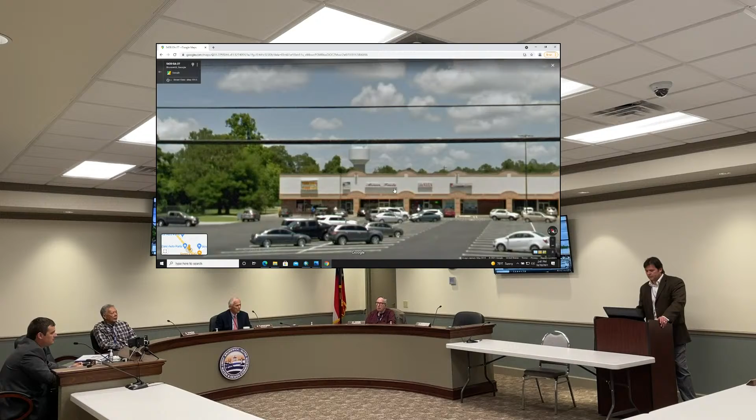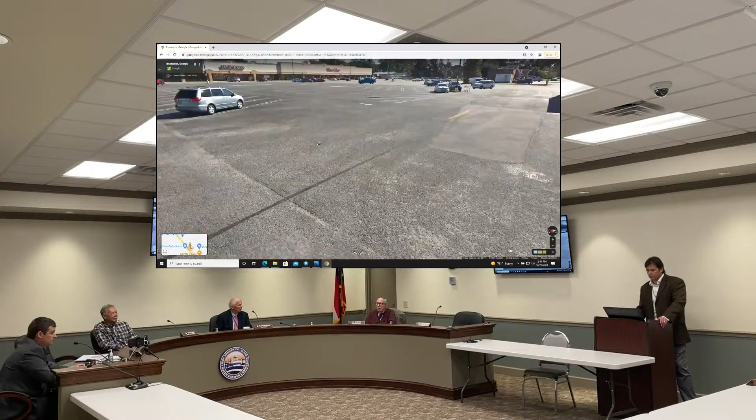I was trying to get a good shot of our I-95 tank, but it's hard to, we won't let Google into the facility. That's at the water lab, it's not very pretty, it's really off the beaten path, right there behind the school.

I was trying to get a drone down on the south end. We need to get your drone pilots out there. That's up at exit 36, Cate Road, Glendale, Crispen area, the dumpy one by Winn-Dixie, where Donnie's office is, right behind the school. That's a concrete-based hydro pillar.

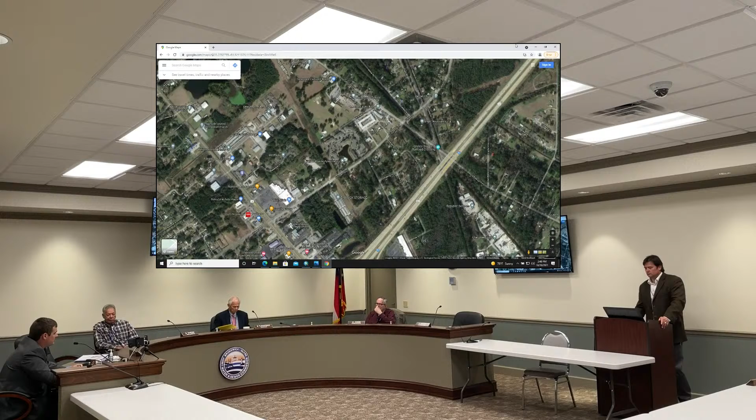Speaking of Donnie, and we talked about the galvanized and composite tanks, I'll mention this again tomorrow. We did apply for a distribution system award again, as we did last year, and we've been notified that we will be getting the gold level award once again for our distribution system work. We'll have representatives at the GAWP Fall Conference to accept that award in person.